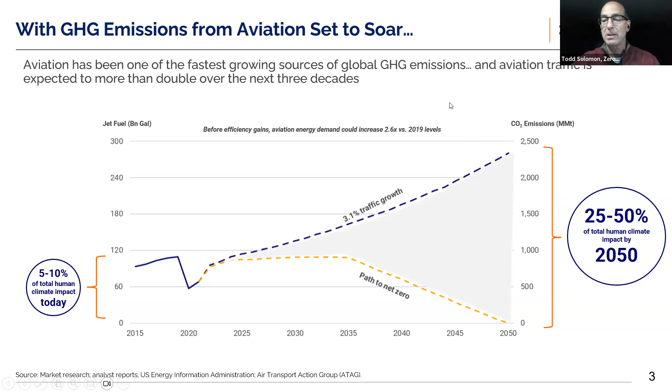But as electric vehicles take over fossil fuel vehicles, at least in the lower 48 and around the globe, aviation's contribution is going to continue to grow because other industries are abating. Aviation is one of those hard to abate industries. Plus, air traffic is expected to grow. So in the end, we think the contribution of aviation to climate change is going to be far more significant than it is today. I personally think we should take it on anyway - if it's 3%, it's 3%, but that 3% can be reduced. So why not go that route?

Another issue we have is that two-thirds of the impact of aviation on climate might not be coming from carbon. It's unclear, but NOx and other particulates coming out of the back of the airplane may also be climate impacting. And if they're not climate impacting, we know they are air quality impacting. So if you're in a community around an airport, your air quality is impacted by the stuff coming out the back end of an aircraft.

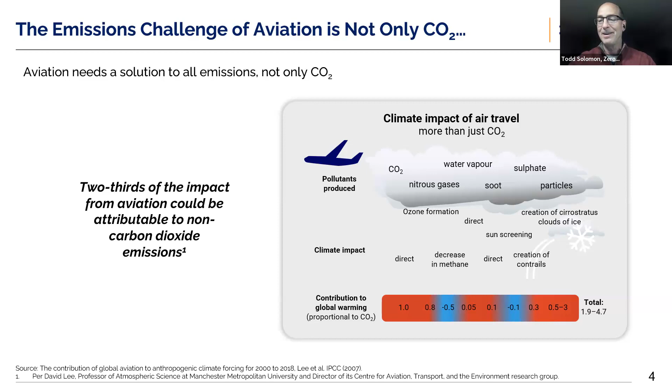I saw this study of LAX. The cool thing about LAX is that the wind is always blowing in one direction, so you can do a study of asthma impact and see that it's directly correlated with the flight path in and out of LAX, and it's really discomforting to see.

But the other issue - so I said there are two problems - the second problem is that air service has again been reduced to isolated communities. At least in the lower 48, one of the impacts of COVID was a slaughter of sub-regional airports. I know air service is essential in Alaska, so I'll go out on a limb - I haven't looked at the data to see the actual flight volumes, but I suspect it's so important that the COVID impact on travel is not the same as the need for getting food, medical supplies, and whatnot in and out of communities up there. But I'm happy to be corrected on that.

All right, cool, so that's another of the issues. We didn't start with hydrogen - we started with battery, because as I said, our founder came from the EV space. He first started looking at battery electric aircraft, and of course quickly came to the conclusion that batteries were too big, too heavy, and need to be replaced frequently, and they're expensive. They're also, at least currently, not made of the best material.

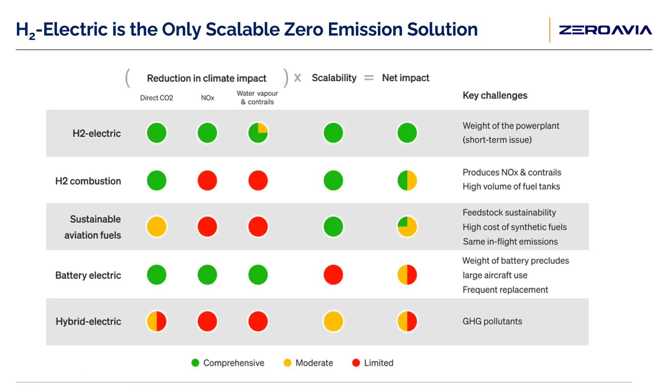So he started looking around at other things. Of course, there's sustainable aviation fuels - there's a lot of research funding distributed for sustainable aviation fuels. Then you have PTL fuels, syn fuels or e-fuels, however you call them, where hydrogen is used as part of the process. The problem with those fuels and with hydrogen combustion is that you're still burning something, so you're still going to have those non-carbon emissions. Although there's going to be some reduction, I know, with hydrogen for example.

The data is not nearly final on what the impact of those non-carbon emissions is. Even the guy we cite as our reference in that previous slide about non-carbon emissions has said we really need to look at this further. I sat through a presentation from an FAA scientist who was trying to convince us that actually those gases were temperature decreasing instead of increasing.

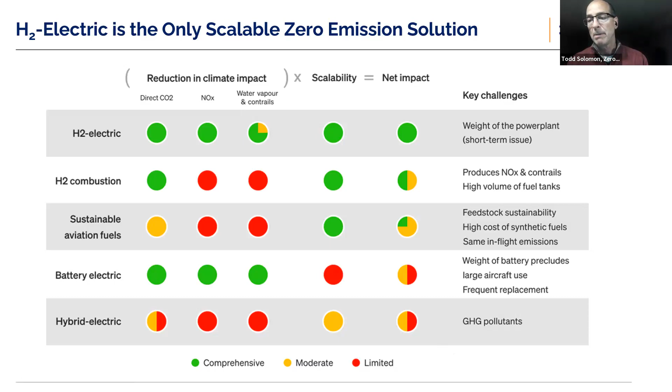In the end, we arrived at the idea that a hydrogen powered electric motor, so a hydrogen fuel cell motor, would be the way to go. So that's our solution. There are many people in the company who showed a slide like this and call it the solution. I'm trying to be a little more open-minded these days. But one of the solutions we propose is a hydrogen electric engine in every aircraft. It's a super ambitious idea, but I think if you're going to have a mission statement, you might as well go whole hog.

There are companies also working in the hydrogen space, like Airbus, GE, Rolls-Royce, large companies who will say that if you're going to use hydrogen to power flight and something large like transoceanic flight, it's going to have to be combustion. So there's really a plethora of ideas now circulating in the space. In fact, one of the things we've been talking with Airbus about is a model where we use hydrogen combustion to get these A380s off the ground, and then use a fuel cell to power the glide flight, the cruising altitude flight.

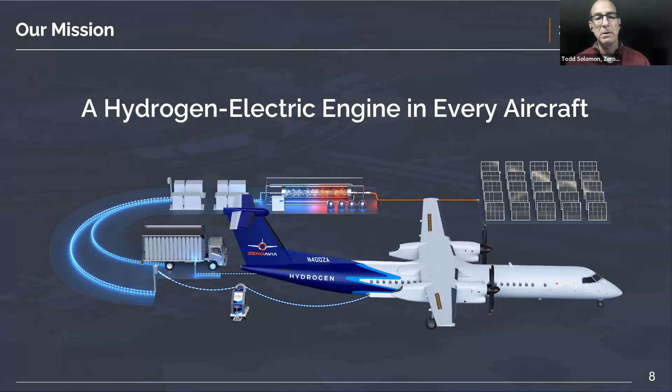You guys are all in this hydrogen working group. I don't know how much tech explaining I want to do here, you might know more than I do. But essentially what we have is a model where we have hydrogen, in this case shown on the wing, it goes into a fuel cell.

At the same time, we have oxygen coming into the fuel cell. We have that catalyzed with a proton exchange membrane, so that in order to bond with the oxygen, the electrons from hydrogen have to go around a circuit, a course where we can capture them into our electric motor. And in between the fuel cell and the electric motor, there's actually a DC to AC inverter. I only mention it because in the end it's become quite important to our power electronics.

So that's on the left side of the screen. The beauty of this is, of course, that the only emissions would be water vapor. There are lots of people who think that water vapor is itself a cloud forming emission, and likely to trap heat with those clouds at a certain altitude.

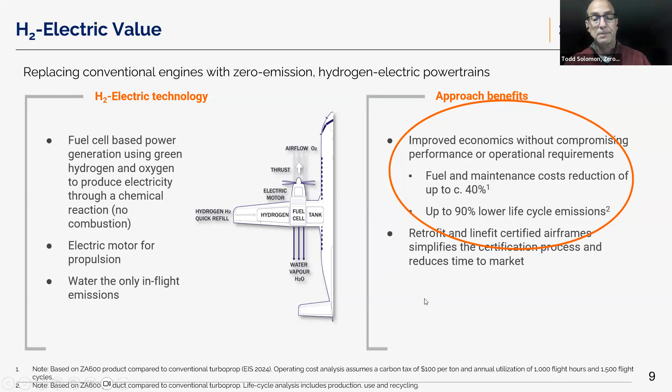So we then scaled up in '21 to a 600 kilowatt motor, and that was a little heavier. We had to mount it on a legit truck that we call the Hypertruck.

And of course, if you've spent any time in hydrogen in the last year, everything has to begin with HY, no matter what it does. So you'll see a number of our technologies might have that flair as well.

In 2022, we started transplanting this 600 kilowatt motor into a Dornier 228. It's a twin turboprop airplane, so we can use a conventional engine on one side for redundancy and safety, and then test it out on the left side with our powertrain.

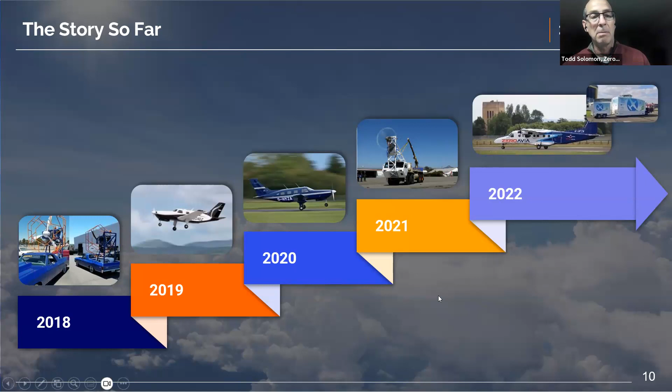In late January this year, we flew that thing for the first time. We're now flying it about weekly, tweaking it, flying it, getting the data back, seeing what we're learning.

The goal here is that by the end of the year, we'll have a setup that we think is going to take us into certification and the launch craft for this. So we'll start the cert process with the authorities in '24.

Our launch aircraft is going to be a Cessna Caravan, which is quite relevant for the Alaskan market, as it turns out. Having looked at a number of the Caravan activity around the country, Alaska stands out pretty nicely as a target market for us.

Hence our joining Launch Alaska in the tech deployment track this year, which was a really good experience, and I think increased our interest in the market, if nothing else. I think we learned a lot about the state, but we also learned that there really is a good target market for us here.

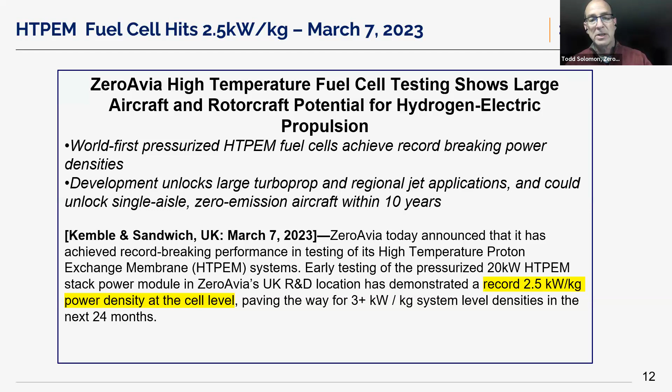And that group is based in Everett, Washington, north of Seattle at Paine Field. And just yesterday, I was there, and we were unveiling a partnership with Alaska Airlines.

No relation. Well, some relation, but I believe they're Seattle based. Anyway, we got from them a Dash 8 Q400.

And you can see it's nicely tricked out. It looks really nice, but the next step is to put a 1.8 megawatt engine motor into one of those nacelles. So it's another twin turboprop, much larger. This one was a 76-seater.

In addition to unveiling the aircraft yesterday, we demonstrated - again, you see the Hypertruck on the right side of the screen. This time, instead of the 600 kilowatt, it's got a 1.8 megawatt on it. It's spinning the same prop that is on the Dash 8 on the other side of the screen, and we're using the same gearbox that's on the Dash 8. So we're really trying to mimic exactly what would happen in the air.

We ran it yesterday on batteries, to be full disclosure, but the truck is ready with fuel cells. It has tanks of hydrogen on board. We just didn't have time to test it in time for yesterday's event.

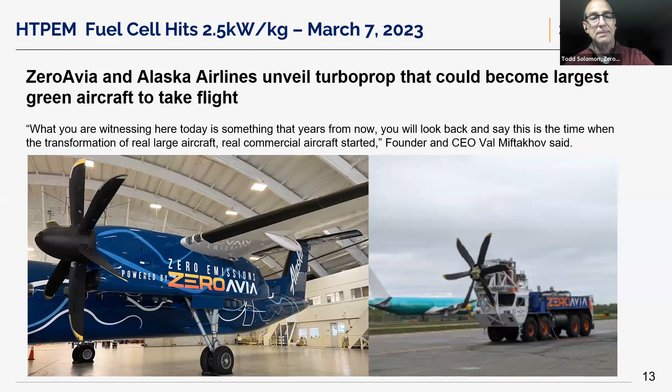So this is where we're going. We're hoping to be in the air in commercial service in '25 with the smaller motor. We're hoping to be test flying the Dash 8 sometime next year. We took a little informal poll among ZeroAvians yesterday at the event, and I think the consensus is October would be a reasonable target to see that thing in flight. So that's the ZA 2000.

The beauty of that system is that we think we can fly regional jets with that same powertrain. Obviously there's going to need to be some tweaking done to it, but that will really unlock things.

The reason Alaska was able to give us the Dash 8 is because they're discontinuing the use of it. But there are a lot of ATR 72s out there flying commercially. A lot of them are being used for cargo. FedEx is one of our target launch customers, and they also fly a lot of Caravans. But the CRJ 700 and the Embraer 175 are real workhorses in regional air travel, and we really have our sights set on that before the end of the decade.

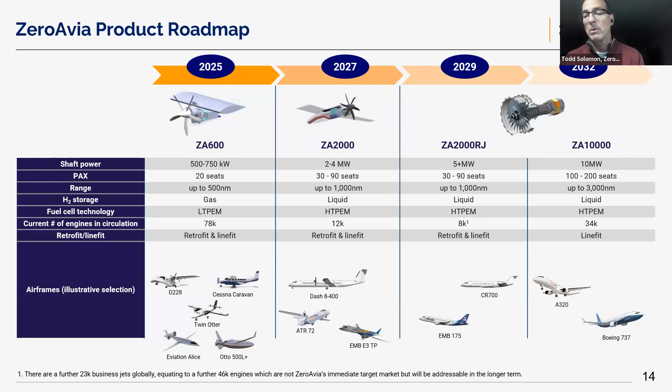We're not alone. I love talking about ZeroAvia, but I'll tell you this: we flew our 19-seater in January, but our primary competitor, Universal Hydrogen, flew a Q300, Dash 8 Q300, in March of this year. So right now they have flown the largest hydrogen aircraft. I don't know if y'all know Joby, the eVTOL startup - they bought themselves a hydrogen aviation company last year, or in '21. And as I said, Airbus and Rolls-Royce have been working on this stuff. GE has partnered with Safran to work on this too. So there is a sort of nascent industry going on there.

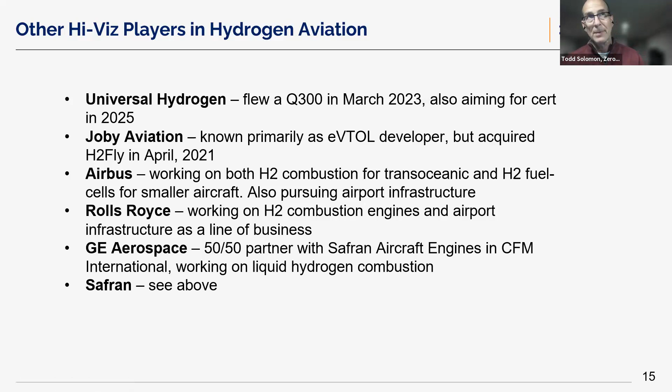We all have the same goal, and we're working more or less cooperatively, I would say.

Perhaps getting to what might be more interesting for you guys, the question related to hydrogen in Alaska is: what are we going to do to get hydrogen to the airports? It's one thing to build hydrogen electric aircraft, but if there's no hydrogen at the airports, they're going to look awfully pretty and sit awfully still.

So I say we have 2.5 approaches. There are two approaches, right? You can have hydrogen produced at the airport, electrolyzed on site, or you can truck it in, or pipe it in. And each airport is going to have a different use case, I think.

And then the 2.5 part is that if you have a grid that can sustain it, you can plug into the grid and electrolyze based on whatever kind of power is coming off the grid. If you want true zero emission flight, you're going to want to buy some sort of renewable energy electricity. And then the other half option is to install some sort of renewable array that the airport owns and operates on campus.

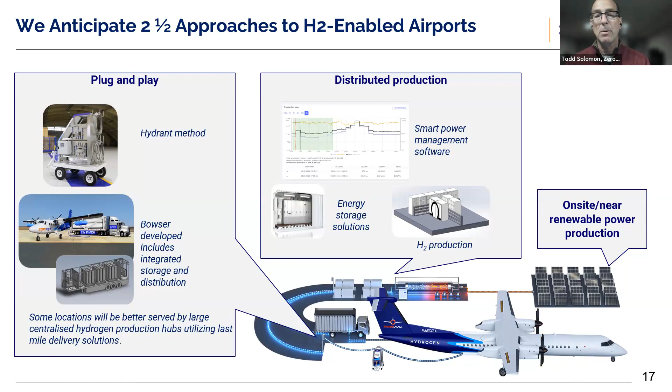We have already started working with airports around the world, most closely with Edmonton. Edmonton Airport is pretty innovative, I have to say, and a lot of the flights going out of Edmonton are going to communities similar to those in Alaska, where the only route in and out, at least in the winter, for some of those communities is by air. They don't even have the benefit really of water access.

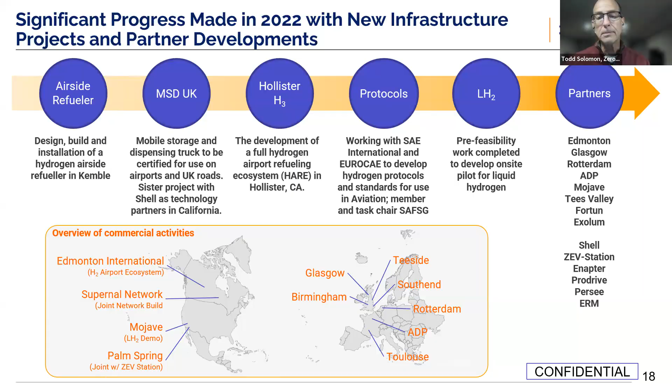Yeah, there are still challenges. There are challenges we've solved and challenges we haven't solved. Energy density of the larger aircraft—getting the right energy density to fly those aircraft is not easy. The Universal Hydrogen flight, although it was on a Dash 8 Q300, really the hydrogen electric engine they used was underpowered. They used a 600, 650 kilowatt motor. The FAA is not going to certify that technology.

But we think our high temp fuel cells will help. Onboard liquid hydrogen storage is definitely a problem—I think it's probably the hardest solve that we have, because hydrogen takes up a lot of space. As you all probably know, it's got great gravimetric energy density but just really not so good volumetric energy density. So it takes up a lot of space, and that's an issue for the economics of a route.

Safety is an issue. Hydrogen on board, especially if it's liquid hydrogen, you're going to have fugitive hydrogen control issues. So we have all these material choices to make, design alternatives to figure out. And then for us, the regulatory environment has been a bit of a challenge.

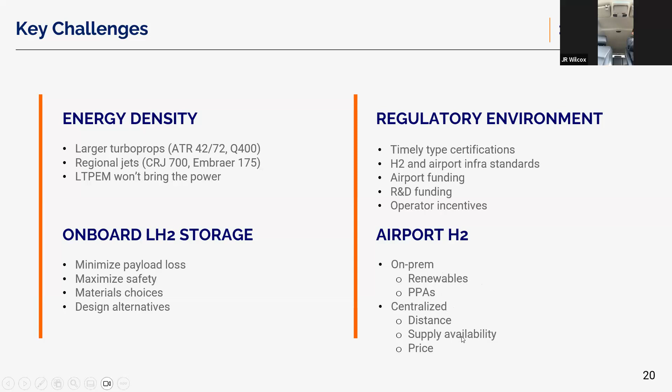And then at the airport, access to renewable energy if you want to produce on premises, or access to power purchase agreements, is not something that's easily had at every airport. If we're going to do a centralized model, where there's hydrogen somewhere nearby an airport, how close is it going to be? How much supply is going to be available?

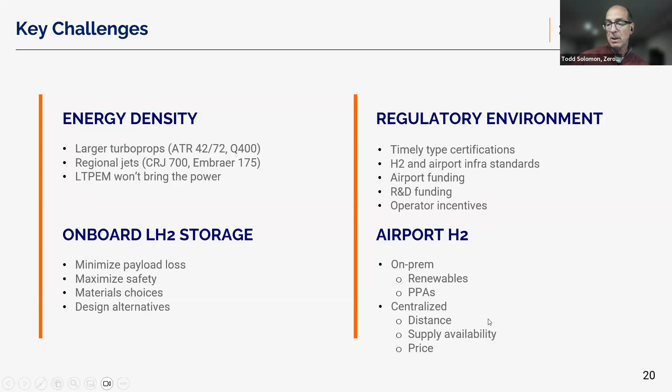Is it going to be expensive? We know that the cost of sustainable aviation fuels is going to be higher than the cost of Jet A. We know that power-to-liquid fuels are going to be even more expensive. We know that, at least right now, there's a hydrogen production tax credit. We don't know how that debt ceiling dilemma gets resolved. So there's a lot of uncertainty there.

So with the energy density, we think the high-temp PEM and the engines, the string and the motors in sequence in series, solves that problem. We are working on liquid hydrogen storage. We're doing a lot of it in-house, and we're also working with some partners on that.

We have a very intense culture at ZeroAvia of wanting to control as much of the IP as possible on the aircraft. So it's interesting, because Universal Hydrogen has a really cool hydrogen storage model, with small tanks that they put in racks. You land your aircraft, you swap a rack for a new rack, and you're good to go. That's a pretty cool idea, I think, actually.

It's sort of like Nespresso or Keurig, where you could give the machine away, or a printer, right? You can give the printer away, knowing that the customer is going to be spending 20x the printer cost on ink for the next few years.

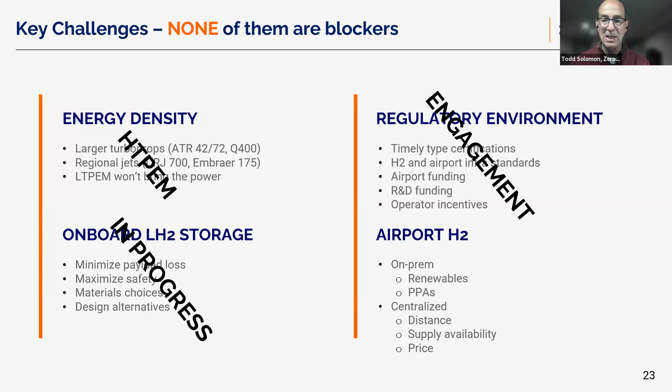So I say that because we're trying to do as much of the hydrogen storage in-house as possible as well. The regulatory environment, that's my job. I've been working really hard on it. We're getting good results. We don't have to explain how it all works anymore. When we say hydrogen aviation, people in DC, the decision makers and policymakers, seem to know what we're talking about.

There's some issues about whether those hydrogen production tax credits are going to stay in place. It seems almost impossible to imagine we're going to get operator incentives anytime in the near future. And then we have a modular hydrogen airport refueling ecosystem that we're calling HARE. It fits in the size of a shipping container.

So you have an electrolyzer, compression, and some storage. The first iteration of our aircraft, the Dornier with the 600 kilowatt motor, is using gaseous hydrogen, and it uses very little, like 60 kilograms per flight for a 250 nautical mile flight. So storage and production are not going to be that demanding in our next few years.

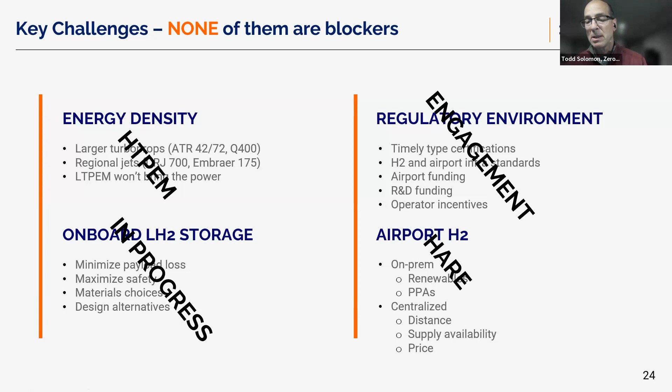But then we get to the point of needing liquid hydrogen, needing more of it, and I think that's where the working group comes in. To be honest, I think that's why I'm excited to join the group and see what we can do to amp up hydrogen production in Alaska. And that is really my last slide.

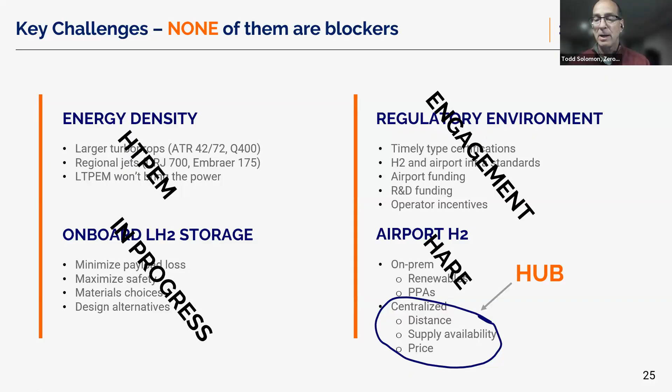I think my first question is along the lines of what Jason Moncrief was also trying to clarify in the chat: the amount of hydrogen that you need, or project you may need, as you scale up your operations. Can you offer any numbers there to help us out?

So the caravans will use about 60 kilograms per 250 nautical mile flight, that's a typical mission. We're looking at less than a ton a day that we're going to need pretty clearly for a couple of years.

When we start getting to the larger aircraft, depending on the volume at the airport, I think we're closer to like 2 or 3 tons a day, per airport.

Do you know how your projected usage compares with some of the other companies that are playing in this space?

I don't. Well, the thing about Universal Hydrogen's model is because they have this canister model, their hydrogen can come from anywhere, it doesn't need to be near the airport. I think their idea is to truck it in, but then you're talking about a lot of truck trips in and out of an airport, which is okay at a smaller airport where there's not a lot of traffic, but it becomes problematic later on. If you were doing it at Anchorage, I think it would be a little bit tedious.